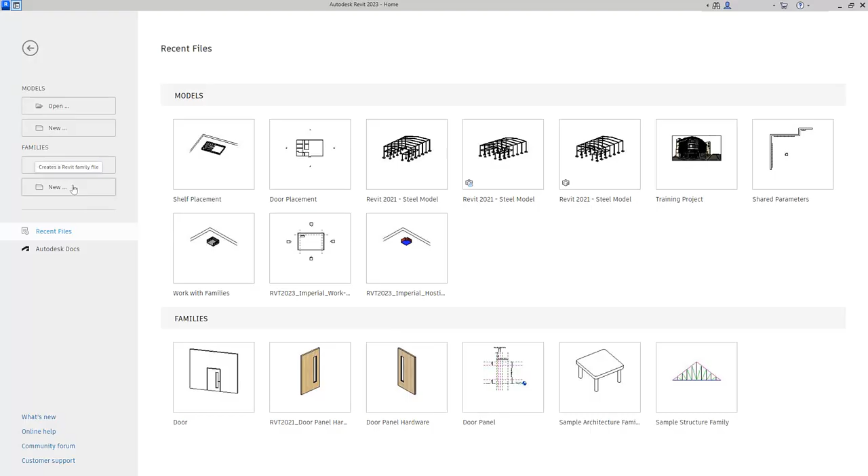We'll begin by creating a new family. On the Revit home screen, go ahead and select New Family. In the New Family Select Template File dialog, we'll begin by selecting Generic Model Wall-Based and click Open. The new family opens in a plan view. You can clearly see our wall host, two reference planes which define the origin of our family, and a piece of text describing the placement side.

Our first task is to set the correct category. So this is going to be categorized as furniture. Currently, this is set to generic model. To change the category, on the Create ribbon in the Properties panel, we'll go ahead and select Family Category and Parameters. We'll clearly note here that the current category is generic model. Let's set this to furniture and then go ahead and select OK.

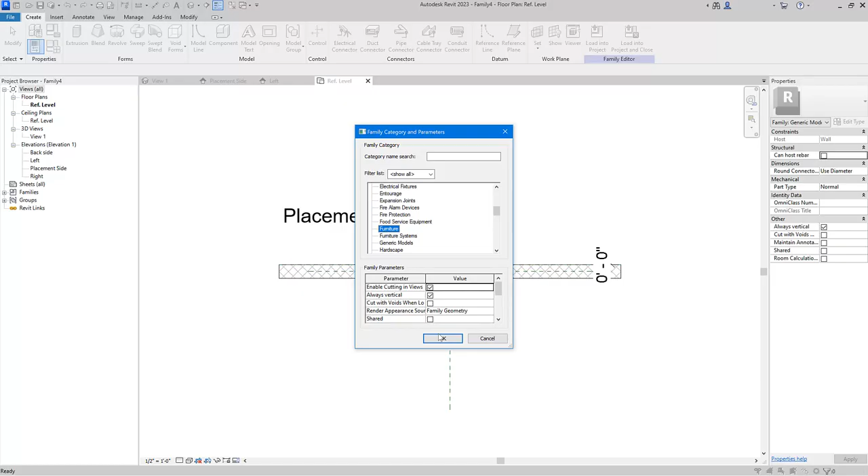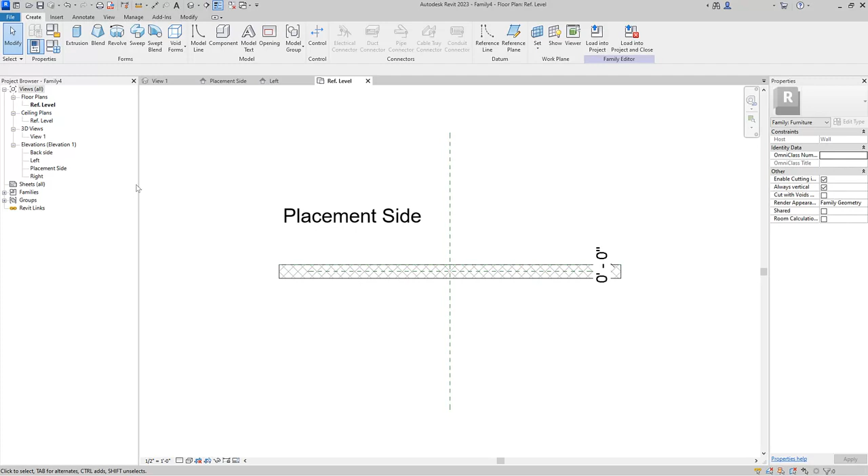As well as setting a category, quite often built-in parameters are automatically created as well. And in our case, we have a new parameter already created representing the height of our furniture. We'll now start to set up our parametric framework. We'll begin by going into an elevation view. In the project browser, under Elevations folder, let's open up Placement Side.

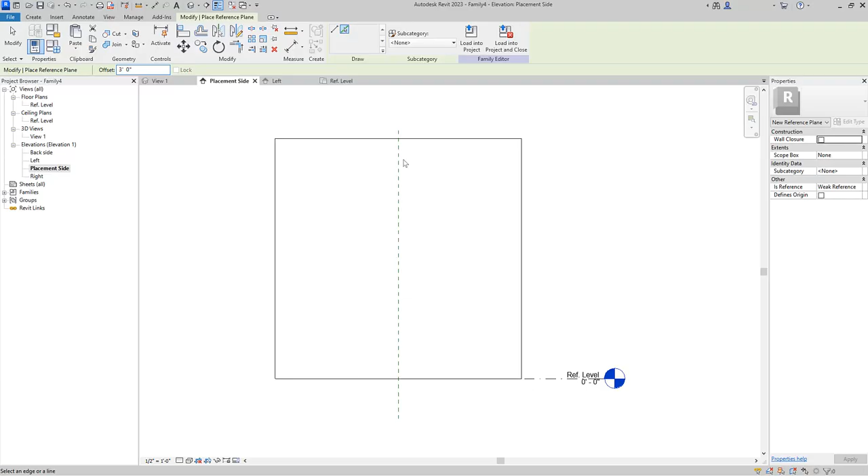We'll begin by creating some additional reference planes. On the Create ribbon in the Datum panel, go ahead and select Reference Plane. On the Context ribbon in the Draw panel, we'll ensure that we're using Pick Lines, and on the Options bar, we can now set an offset. Let's begin by entering 3 feet. We'll then take this reference plane here and offset it to the right. That's going to represent the width of our bookshelf.

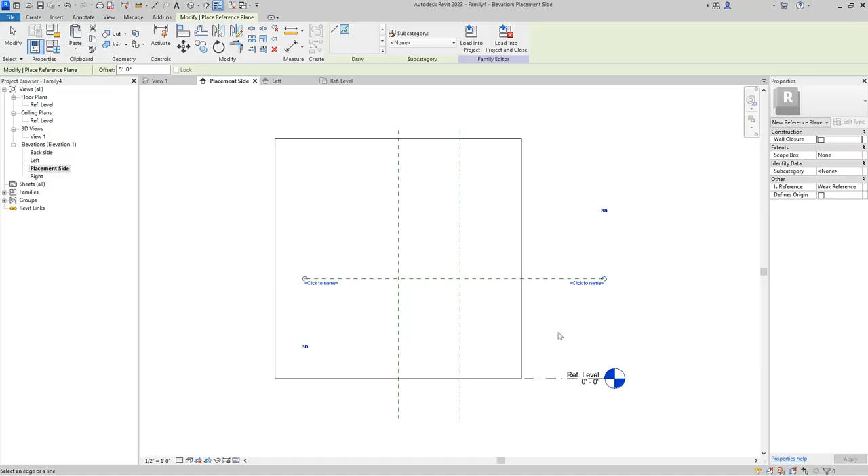Next, we want to create another reference plane to represent the height. This needs to be set to 5 feet. So again, on the Options bar in the Offset box, we'll set this to 5. We'll then take our reference level and then offset this above. We now have the basic reference planes representing the outer shape of our bookshelf. We'll now create some additional reference planes to represent the material thickness. Again, on the Options bar, we'll change our offset to 1 inch. And then we'll offset each of these reference planes inside.

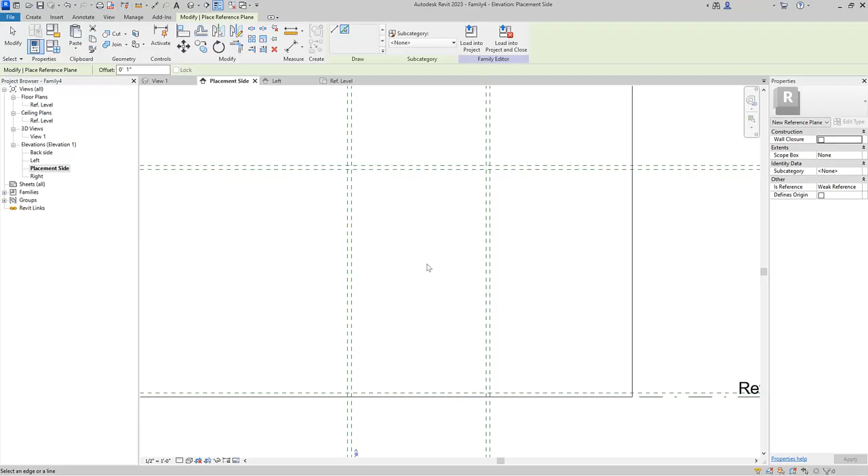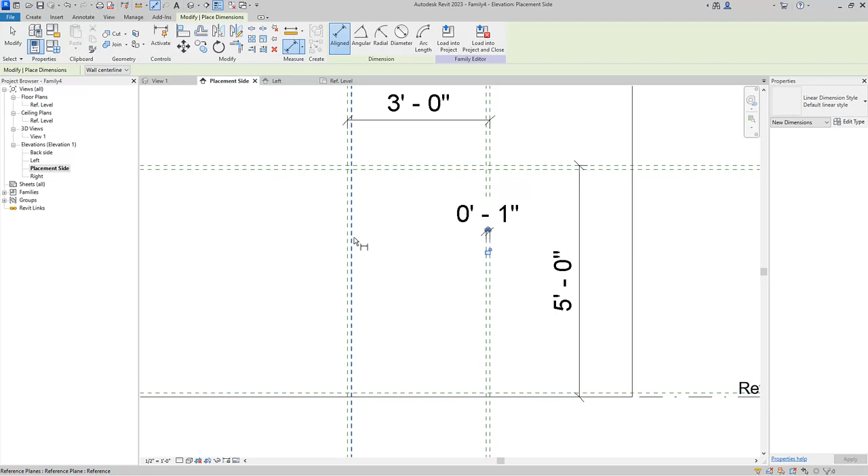We can now begin to add dimensions to our newly created reference planes. On the Context ribbon in the Measure panel, let's go ahead and select Aligned Dimension. We'll begin by dimensioning the overall width and height of our new bookshelf. We'll then add some additional dimensions to set the material thickness. And we'll set one more over here and place the dimension.

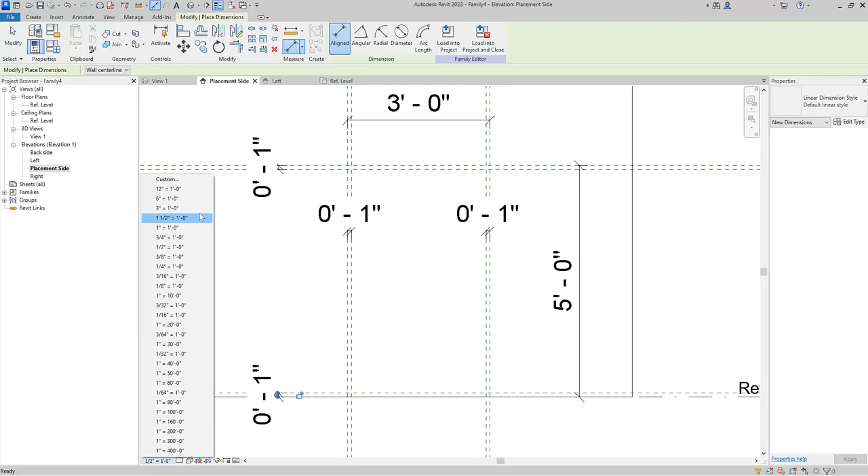You can see that the scale needs to be adjusted here. To do this, on the View Control bar, we'll select the scale and we'll set this to 1 inch to 1 foot. We'll now add some labels to our newly created dimensions. First, we'll exit the Aligned Dimension tool by selecting Modify on the Context ribbon. We'll begin by setting the width. Let's select this dimension here, and on the Label Dimension panel, we'll go ahead and select Create Parameter. We'll name this Width. All the defaults will remain the same in our Parameter Properties dialog, so it's a type parameter, and Revit is suggesting that we group the parameter under Dimensions. We'll go ahead and select OK.

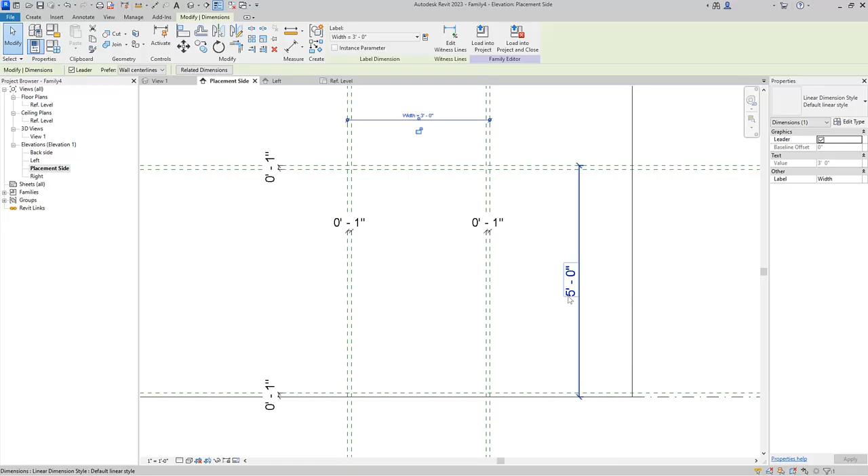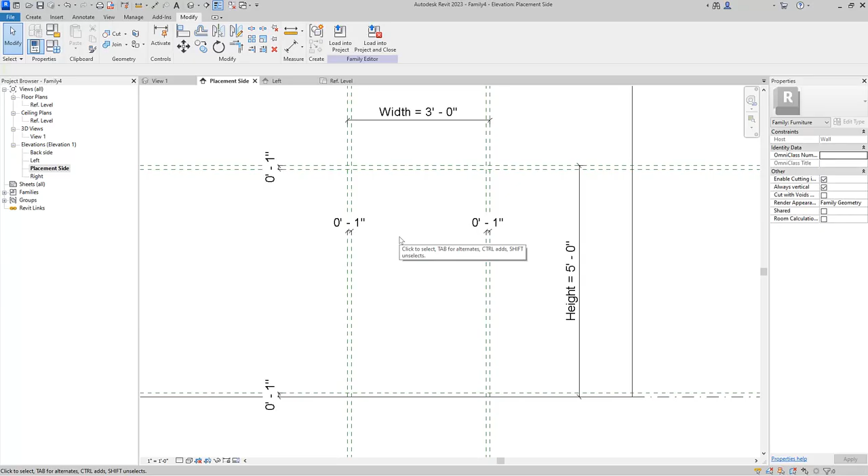We'll now set our height. As we said, this parameter would already be created from the furniture category. This is a built-in parameter. To access this, on the Label Dimension panel, we can go to the Label drop-down menu and select Height. And again, that's now been assigned to that dimension. We'll now select the 4 dimensions representing the material thickness. I'll hold down my Control key and I'll select each of the dimensions. Again, on the Label Dimension panel, we'll select Create Parameter. We'll name the parameter Material Thickness. And again, all the defaults remain the same, so we'll select OK.

So we now have to think about our bookshelf depth. To create a reference plane and set a parameter, we'll change the elevation from placement side to left. In the project browser, under the Elevations folder, let's double-click on left. Here we can already see the reference planes that we've just generated, and now we'll create some additional reference planes.

To do this, we'll select the Create ribbon, and in the Datum panel, we'll select Reference Plane. Once again, in the Context ribbon in the Draw panel, we'll ensure that we're selecting Pick Lines, and on the Options bar, we'll set our offset to 1 foot. We'll then offset this reference plane here, so this is from the placement face of the wall.

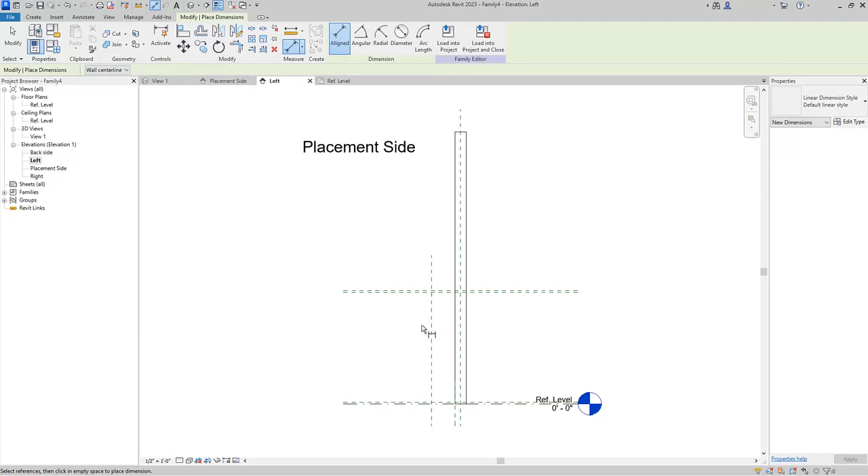We'll then extend the reference plane. On the Context ribbon in the Measure panel, we'll select Aligned Dimension, and we'll add a dimension from our newly created reference plane to this reference plane here. We'll press Escape twice to exit the Aligned Dimension command.

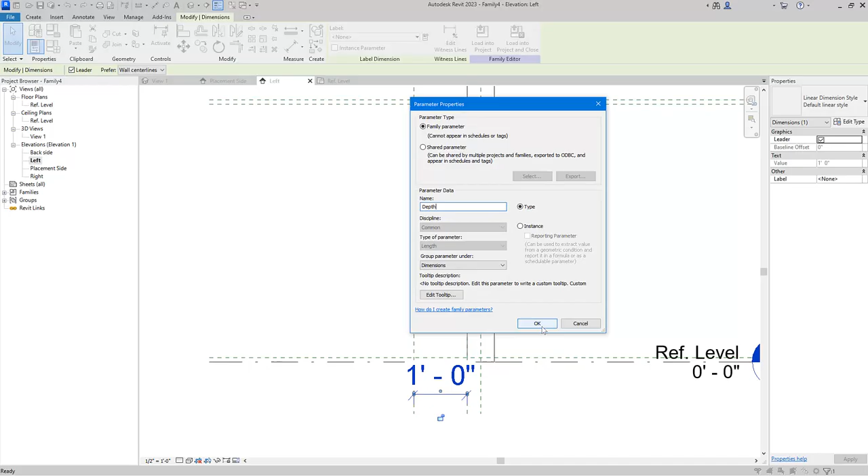We'll then select our newly created dimension, and on the Label Dimension panel, again we'll select Create Parameter. This will simply be called Depth, and we'll click OK to the dialog. Okay, so we're now ready to create our extrusion to create the overall carcass shape of our bookshelf. To do this, we'll switch the view back to the placement side.

To create the extrusion, we'll select the Create ribbon, and on the Forms panel, we'll select Extrusion. On the Context ribbon in the Draw panel, again, we're going to utilize Pick Lines. My intention here is to select the reference planes, and that will form the outline of our shape. On the Options bar, you'll notice that additionally, we can also lock these lines to the reference planes automatically.

We'll then start to select our reference planes, and as I do this, you can see not only does it create the line work, but it also constrains that line work as well. We'll create the internal lines representing the material thickness, and of course now we need to trim all the line work. On the Context ribbon in the Modify panel, we'll go ahead and select Trim/Extend to Corner.

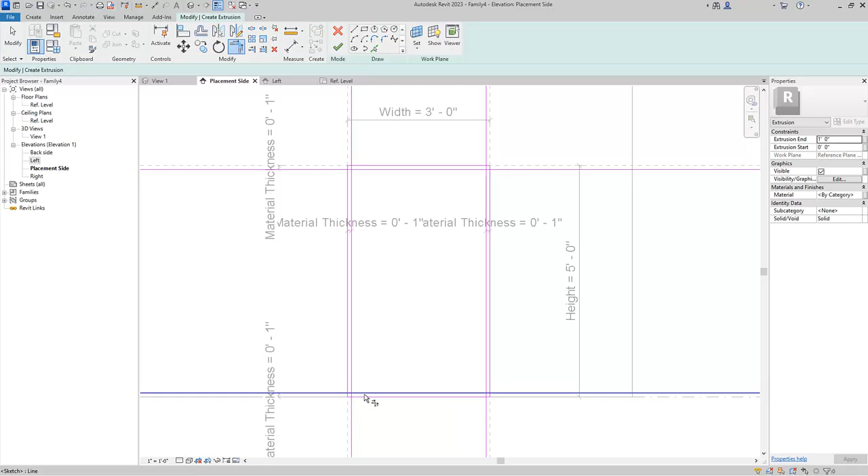We can then work our way around and start trimming this line work. You'll see that the elements we pick are the pieces we want to keep, and the outside pieces are then trimmed accordingly. And we'll then go ahead and do the internal line work. And you can now see the trimming is complete. To finalize the extrusion on the Context ribbon, we'll select Finish Edit Mode.

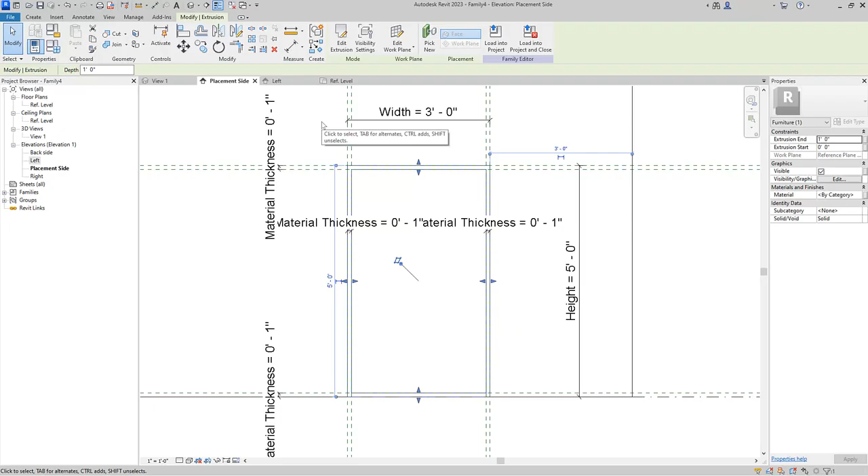Now, of course, we also need to set the depth of our extrusion, and this is best done in the left elevation view. So we'll switch back to the left view, and you can now clearly see our extrusion. We'll use the shape handle here to extend the extrusion to our newly created reference plane, and we'll also constrain.

To constrain the back edge of our carcass to the reference plane here, we'll use the Align command. On the Context ribbon in the Modify panel, go ahead and select Align. We'll select the reference plane that we want to align to, and then the back edge of our extrusion. And again, you can see that that's now aligned and constrained.

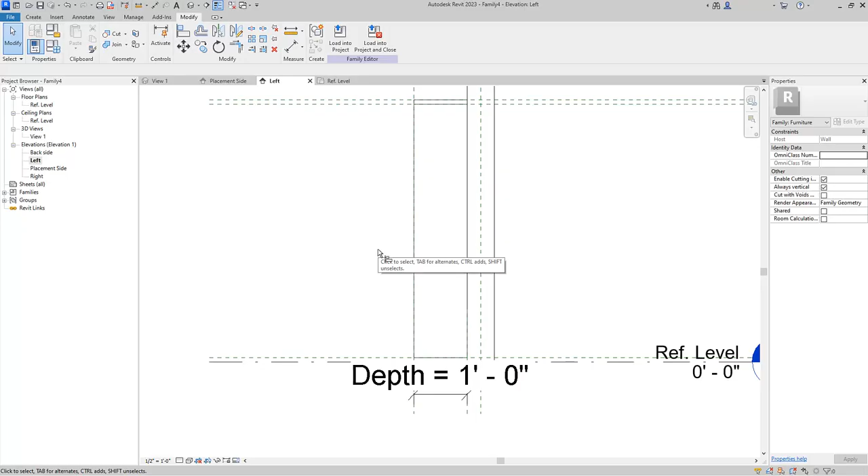To exit the Align command, we'll press Escape twice, and we'll now view the carcass of our bookshelf in 3D. In the Project Browser, under the 3D Views folder, let's open up View 1. We can now see our carcass.

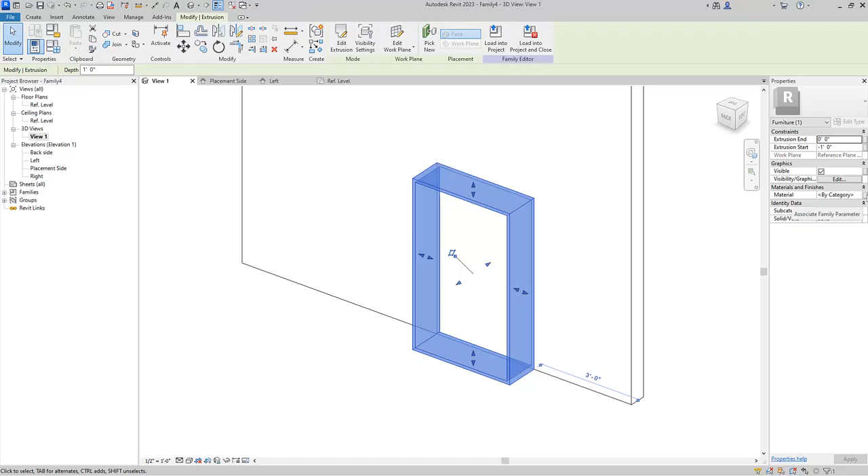Finally, we'll add a material parameter to our extrusion. Go ahead and select the extrusion. In the Properties palette under the Materials and Finishes group, we'll select Associate Family Parameter. You can see in the Associate Family Parameter dialog, we currently don't have any material parameters set up, but in this dialog, we can access the New Parameter command. Let's go ahead and select this.

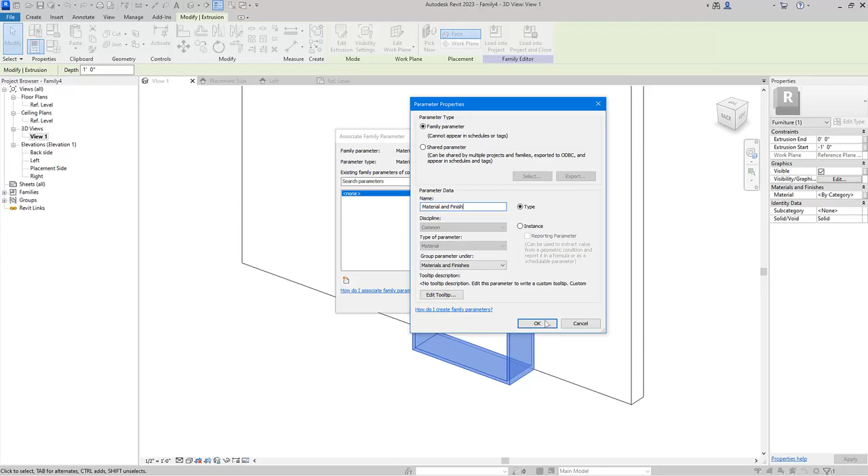And here we'll give this material parameter a name. We'll simply call this Material and Finish. Again, this will be a type parameter, and Revit's suggesting that we group this under Materials and Finishes. We'll then select OK, and OK again to the dialog. To test our new carcass, on the Modify ribbon in the Properties panel, we'll go ahead and select Family Types.

And in the Family Types dialog, you can now see all of our parameters that we've just created. Let's begin by changing the width, so we'll adjust this to 4 feet, and then select Apply. We'll then go to the height and amend this to 6 feet, and again select Apply. And let's now adjust the material thickness to 2 inches, and again we'll select Apply. So we can now see that all of the parameters are working correctly.

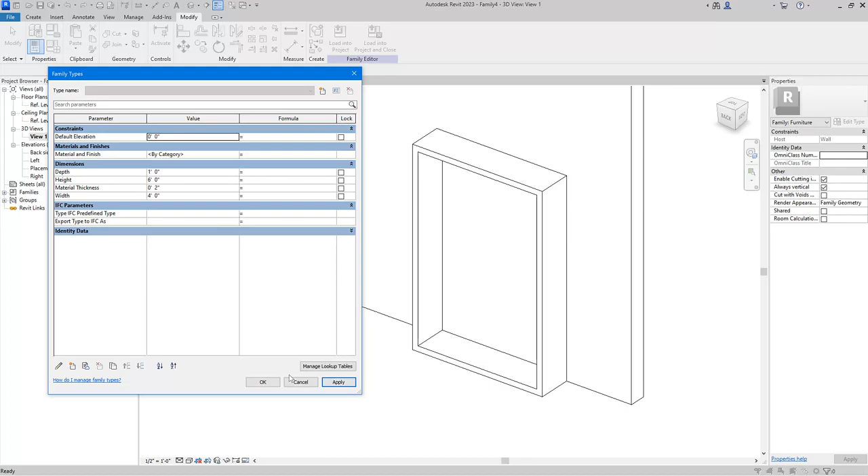Let's select OK to the Family Types dialog, and we'll go ahead and save our new family. On the Quick Access toolbar, let's select Save, and for the file name, we'll call this bookshelf and select Save.